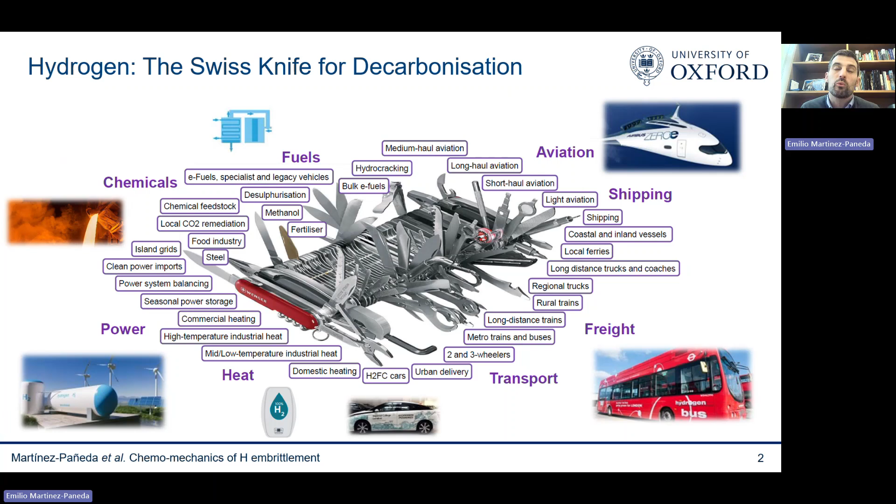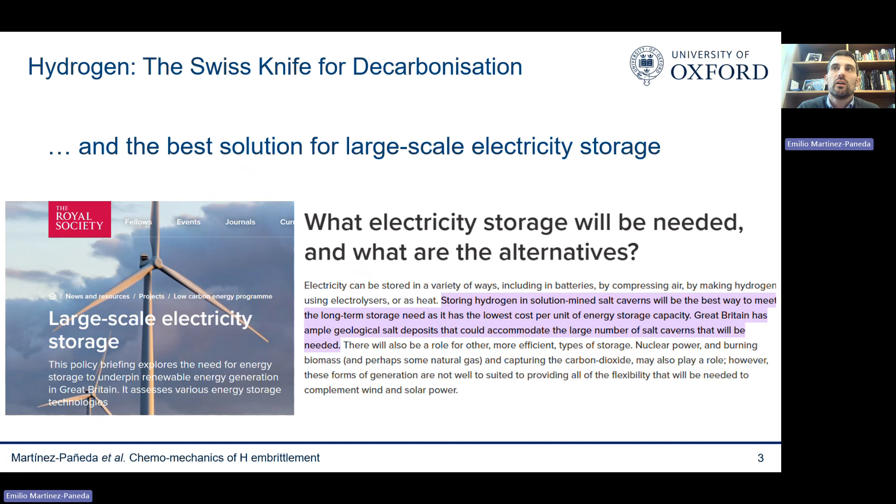As you can see here in this Royal Society report, hydrogen is also deemed to be the best solution for large-scale electricity storage. Large-scale electricity storage is fundamental to a society based on high renewable energy. So yes, hydrogen is going to be there, and governments around the world are investing significant amounts of money in establishing a hydrogen energy infrastructure that currently doesn't exist to store and transport this green hydrogen.

You see in the slide Europe's hydrogen backbone, a framework of 40,000 kilometers of pipelines that includes some new pipes, but mostly, as you can see with the dark color, natural gas pipelines that are being retrofitted or repurposed to transport hydrogen gas.

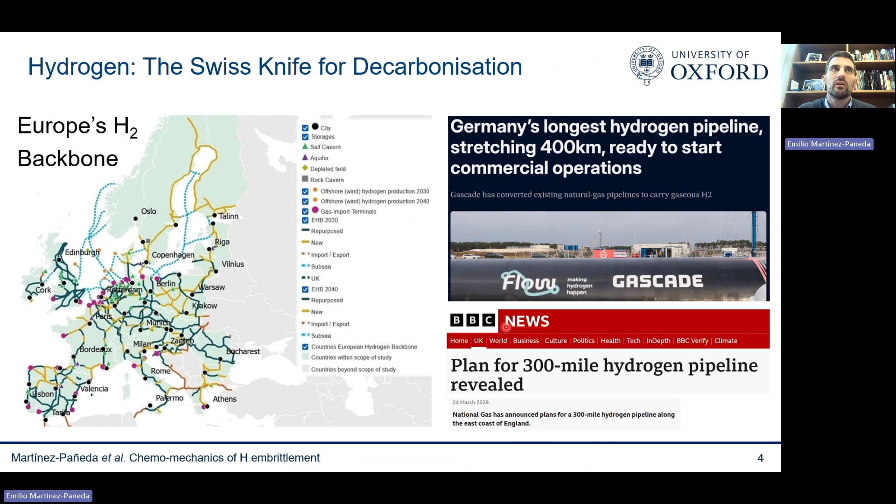As you can see from this newspaper article, some countries are already starting to do so. Germany already has hundreds of kilometers of hydrogen transport pipelines, and the UK is also planning to do so very soon. But the problem with hydrogen is that it has a dark side.

We have known for almost 150 years that hydrogen makes metals brittle. You can see this in this paper from Johnson in the Proceedings of the Royal Society, where he talks about some remarkable and extraordinary decrease in toughness and breaking strain in iron and steel in the presence of hydrogen. In those days, scientific writing used to be very objective, and you would rarely see words such as remarkable or extraordinary. But the way that hydrogen interacts with metals is indeed quite remarkable and extraordinary.

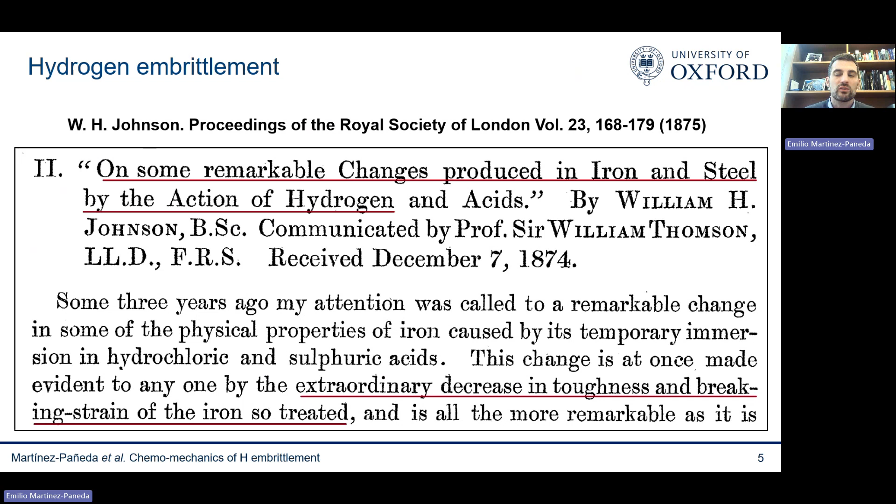You can see some examples here. On the left, I'm showing some uniaxial stress-strain curves. You see that if I introduce hydrogen into my samples, for example by exposing them to hydrogen gas, there's a very significant reduction in ductility, in failure strain. This is a pipeline steel, by the way.

In the middle, you see the impact on toughness. That is quite remarkable. This is for a pressure vessel steel: just 6 parts per million of hydrogen, a tiny amount, takes you all the way from a 220 megapascal square root meter fracture toughness to below 20 megapascal square root meter. So a tiny amount of hydrogen reduces the fracture resistance of my pressure vessel steel by an order of magnitude, going from something very ductile to something that is as brittle as an engineering ceramic.

And the effect is also quite significant on fatigue crack growth. You see this here for pipeline steels exposed to hydrogen gas, in a log-log plot. This is the response in air, and this is, over the Paris law regime, the response in hydrogen. You can see that there's at least one order of magnitude elevation in fatigue crack growth rates.

So we may wonder how we're going to be able to deploy this hydrogen storage and transport infrastructure, given that the materials we use for storage and transport become so susceptible to this hydrogen embrittlement phenomenon.

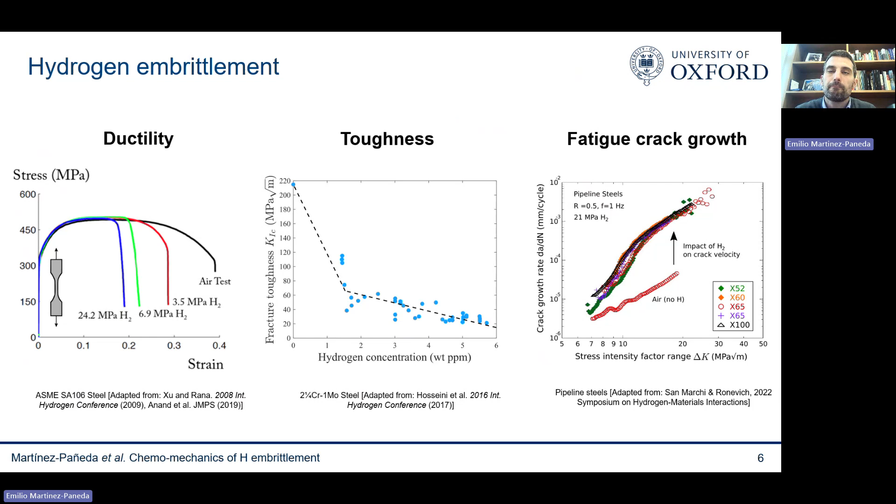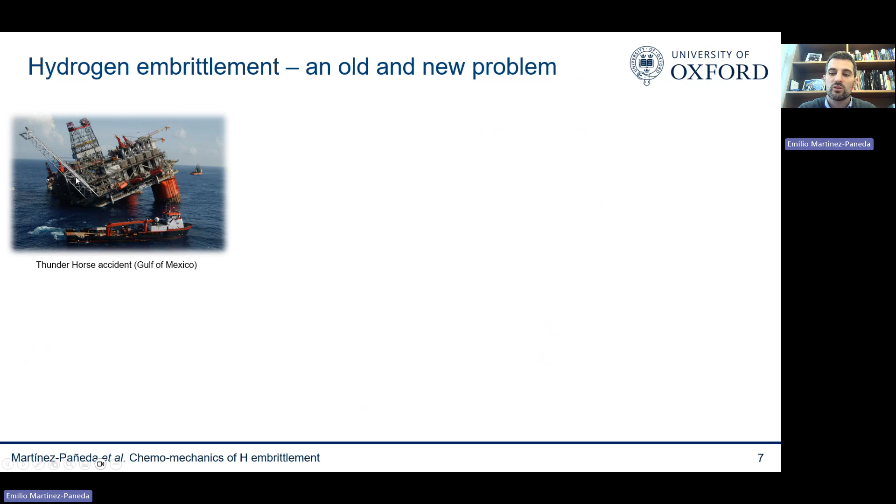But not only in this environment - with the use of modern high-strength steels, which are more susceptible to hydrogen, we are seeing hydrogen-assisted failures in many applications and sectors, just because of the hydrogen coming from humidity or from manufacturing processes. You see here a couple of famous examples: the San Francisco Bay Bridge bolt failure, but also the Cheese Grater, or Leadenhall Tower, in London, one of the most famous skyscrapers in London from a few years ago.

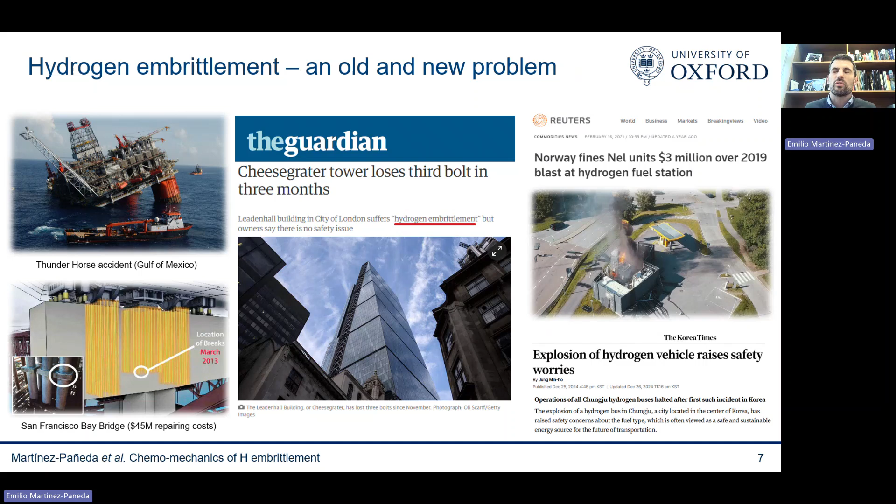This is going to be an even bigger problem when it comes to the energy transition, where we want to store and transport hydrogen gas at large scale. Even though the technology isn't there yet, very few countries have already started to deploy this infrastructure, and those countries are already seeing accidents as a result of hydrogen-assisted fractures.

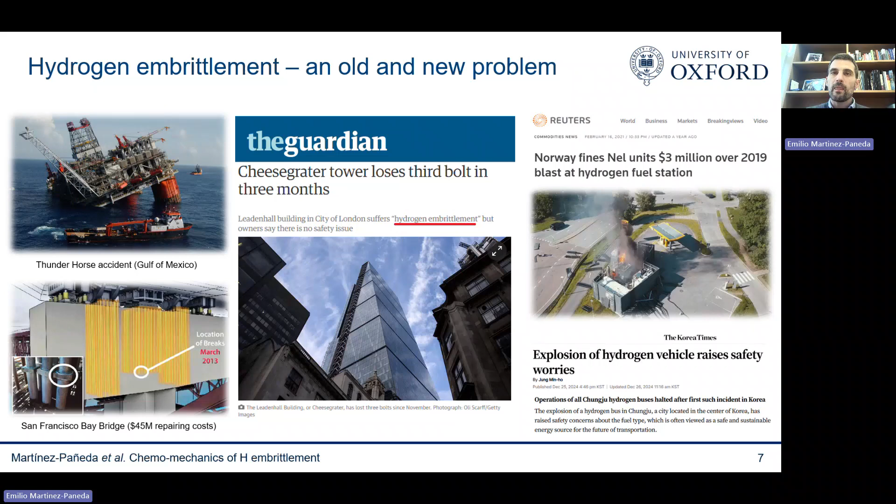So what we need is some sort of mechanistic tool and framework that allows us to predict when these failures will happen and prevent them, but also to map safe regimes of operation so we can accelerate this energy transition and deploy hydrogen energy infrastructure faster and more safely. This is what we've been working on in my group for the past few years: developing a mechanistic computational model capable of predicting when hydrogen-assisted failures will happen.

My philosophy has always been to maximize the physics and minimize assumptions and parameters. Ideally, I would like a model that does not rely on any magic fitting parameters, alpha, beta, that have no physical meaning. I want a model that relies purely on well-identified physical properties I can independently measure in my lab—yield stress, diffusivity—things with clear physical meaning.

The only way to do that is to resolve the physics of your problem explicitly, directly. So I'll explain how our modeling framework encompasses the three main stages of hydrogen embrittlement: the hydrogen ingress part, the uptake of hydrogen into the metal; the transport of hydrogen within the component; and finally the embrittlement process itself, how hydrogen assists in nucleating and growing cracks. Let me go one by one.

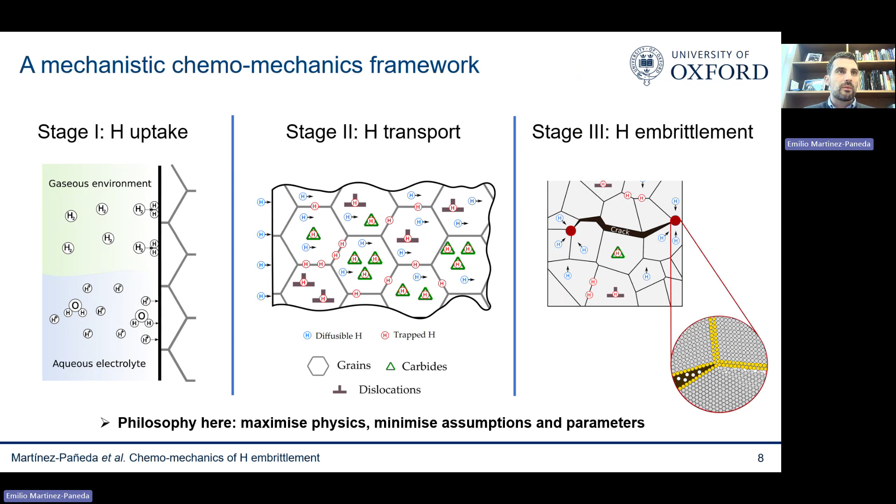We start with the uptake stage. Here the goal is, for a given environment, to predict the hydrogen concentration at the surface of my metal. Hydrogen can come from many places—gaseous hydrogen, any environment containing hydrogen molecules, aqueous electrolytes, manufacturing processes, welding, or soil.

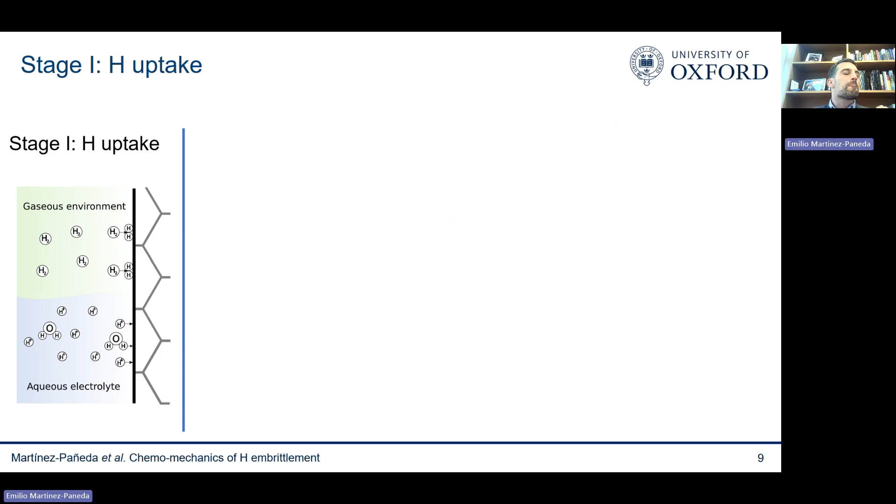But the two main environments I'll focus on today are gaseous environments, which are relevant to the energy transition since we store and transport hydrogen in gaseous form typically, and also aqueous electrolytes, relevant for example to that oil and gas failure I showed you before.

The good news is that for a gaseous environment, under steady state conditions, we do have a closed form solution—what we call Sieverts' law. It relates the quantity I'm interested in, the hydrogen concentration at the surface, with the quantity described in the environment, the hydrogen pressure, which I know or define as an engineer. The only thing connecting them is the material solubility, which I can identify easily with a permeation test.

One thing to be careful about is that this material solubility depends on the hydrostatic stress. You can show this easily—this blue term has an exponential with hydrostatic stress inside it. So the coupling with mechanics is very strong, and normally we measure the stress-free solubility in a permeation test. One has to be aware that this stress-free solubility needs to be enhanced with mechanics if you want to accurately predict the concentration of hydrogen ahead of stress concentrators such as cracks.

But again, this is good news because I can measure the stress-free solubility. This term comes from a finite element analysis for whatever defect I have, and this comes from the environment, so I can predict my hydrogen concentration.

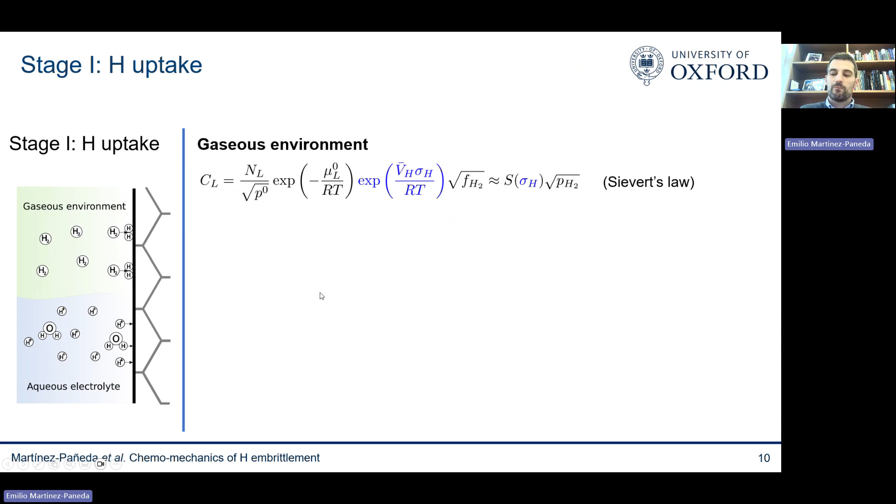In the case of an aqueous electrolyte, problems are much more complicated. You not only need to resolve the surface reactions happening at the interface between the metal and the electrolyte, but also the electrochemistry of the electrolyte, which can be very different inside cracks and occluded environments compared to the bulk, where you can do your engineering measurements.

The good news is we know the differential equations describing each of these phenomena. At the surface, we have the Volmer, Heyrovsky, Tafel, and absorption reactions, so you need to resolve those hydrogen evolution and absorption reactions—again, we know the math for that. And in the electrolyte, you solve for the electrochemistry, the Nernst-Planck equation and the electroneutrality condition, which are relatively well established—the type of models and equations that we like.

Because how those ionic concentrations change depends on diffusivity, Faraday's constant, temperature, gas constant—things that have a clear physical meaning that we can independently measure. And when you do that, you solve these equations in your favorite finite element framework.

This is the type of boundary value problem you solve, where you have an electrolyte with many ionic species, and then a metal that is deforming and has hydrogen being ingressed into it. Every one of these variables is a nodal degree of freedom. So as you can see, the models can get a bit heavy, but computers are big enough these days that we can tackle those problems.

The representative result you get will be something like this, where I'm plotting on the electrolyte any relevant quantity, in this case the pH. You can see how it varies quite dramatically inside of the crack, to the place where we do our measurements—hence why we need these modeling tools.

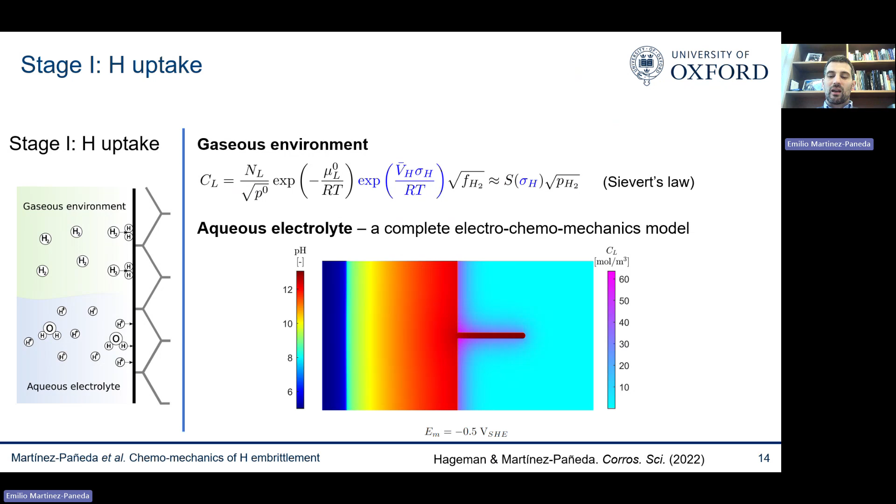We published this a few years ago for three main reasons. One is that it allows us to predict hydrogen embrittlement in aqueous electrolyte environments. For example, relevant to that oil and gas failure that I showed you before, for a given environment I can predict what is the uptake of hydrogen, and then I can predict how much hydrogen changes our mechanical and fracture properties. The other reason why they have become quite popular is that they've become very useful for the electrocatalysis community.

Apparently they didn't have a good model, but they're very interested in optimizing the hydrogen evolution reactions and developing electrolyzers that optimize that behavior. So this model has proven to be quite useful for them.

Finally, last but certainly not least, you can use these models to establish a correlation between aqueous electrolytes and gaseous environments. This is important because gaseous environments are what matters when it comes to the energy transition. However, doing experiments in gaseous environments is not only expensive, but also difficult and challenging from a health and safety point of view.

So we can introduce hydrogen to our samples using an aqueous electrolyte, which is much cheaper and easier. Then we can quantify, for that aqueous electrolyte, what is the equivalent hydrogen concentration. So if I go to my crack tip, I can input this here and then understand what is the equivalent hydrogen pressure. We can establish a correlation between electrochemical and gaseous environments.

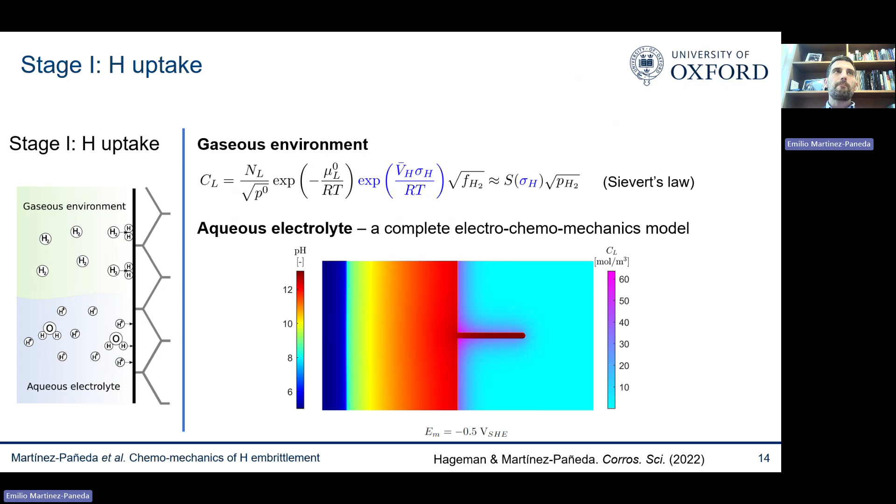Once you know how much hydrogen you have on the surface of your metal, you want to figure out how that hydrogen is distributed within your material, your microstructure, or your component. This is also relatively well understood.

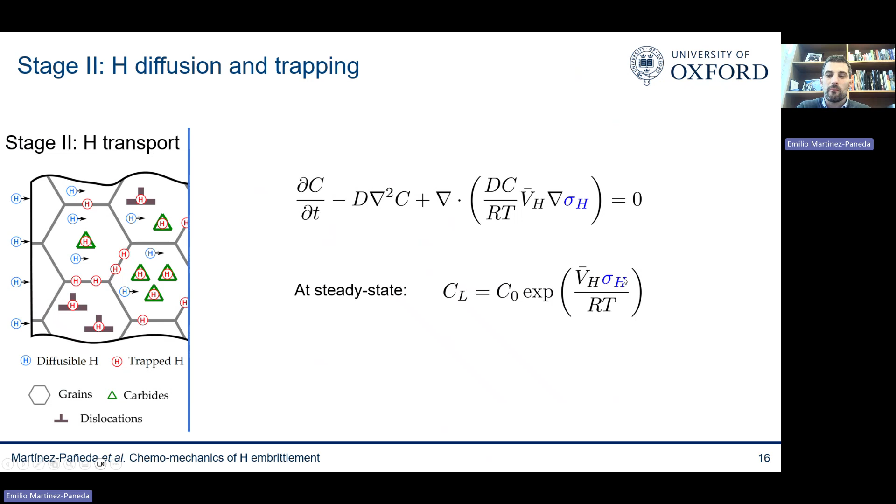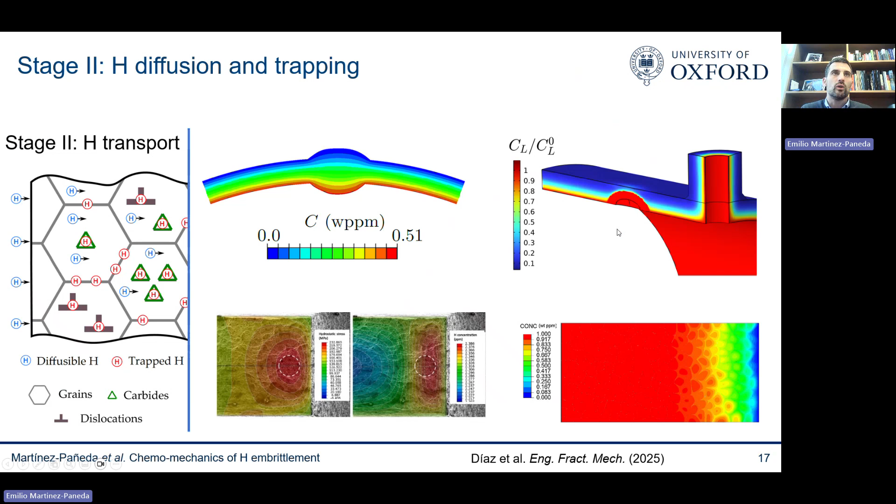Hydrogen not only travels freely through the crystal lattice, it's also sequestered at what we call hydrogen traps—microstructural defects, grain boundaries, carbides, dislocations. We can easily extend the model that I showed you before. You can see here, this is very similar to what we had before.

The only difference is that now we have an effective diffusivity that basically characterizes the fact that as the hydrogen encounters those traps, it slows down its lattice diffusivity. So basically the model relies on two parameters: you now have a lattice hydrogen concentration and a trap hydrogen concentration.

Predictions rely on two extra variables or physical properties. The trap density—how many traps you have. This is relatively easy; you figure out how many grains you have for a given volume. And the trap binding energy—this tells you how energetically favorable it is for a hydrogen atom to go to a grain boundary, dislocation, or carbide. This is something we can measure using TDS, thermal desorption spectroscopy.

And we have developed something that we have in our lab.

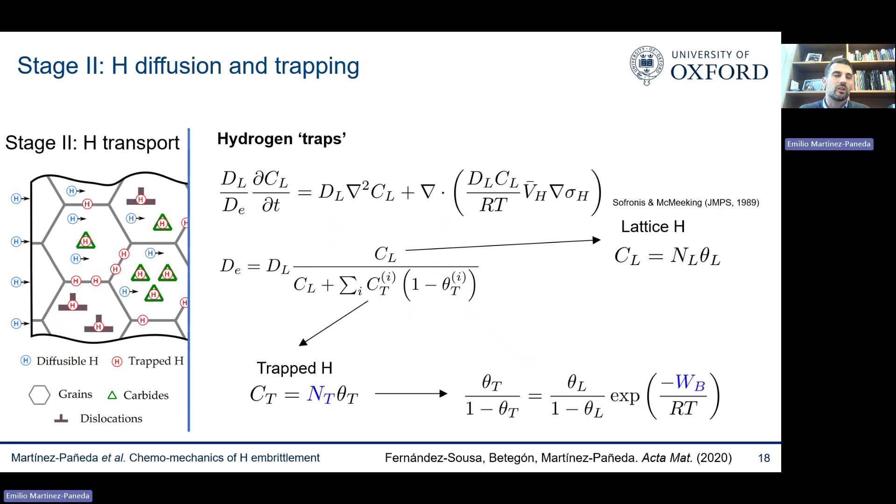And we also develop something called the TDS simulator, which is a Python and MATLAB app that allows you to easily identify these binding energies and trap densities from these TDS measurements.

One thing I will say about these traps is that there's a coupling with mechanics, because in general the trap density doesn't really change. The number of grain boundaries you have doesn't change with mechanical straining typically. However, dislocation traps will change. The number of dislocations you have is related to dislocation density, which is related itself to plastic strains, but also to plastic strain gradients.

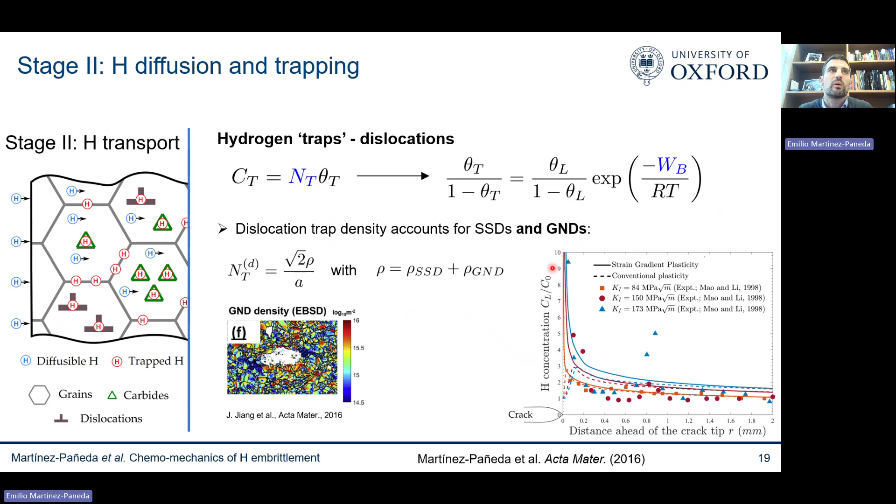And this is an important bit. GNDs dominate behavior near inclusions, cracks, and other stress concentrators. GNDs are also obstacles to other dislocations, so they bring local hardening, as you can capture through strain gradient plasticity theories. And when you do that, it's the only way you can actually show that you're able to capture the very high hydrogen concentrations you see ahead of cracks and other stress concentrators, like you see here in the experiments. So GNDs and strain gradients are important.

Then once you know how much hydrogen you have, where and when, you need to predict the fracture. How does hydrogen interact with cracks? And here there are two challenges: one physical, how does hydrogen actually embrittle metals, and the other one is computational.

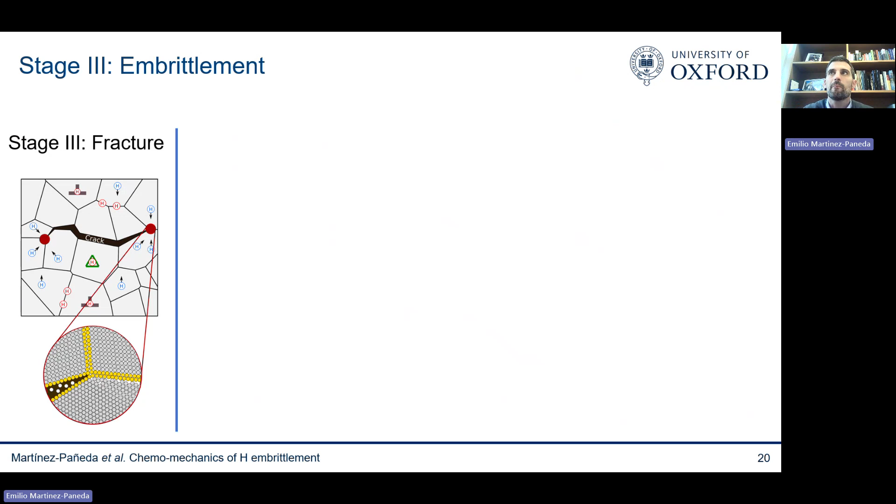You need a tool that allows you to simulate how cracks evolve. Cracks are discontinuities, interfaces. We don't like discontinuities, we like things to be smooth. And we need to capture how this discontinuity evolves, combined with all the chemomechanics or electrochemomechanics I showed you before, like moving boundary conditions and so on. So that's a challenge, and what has worked very well for us there is phase field models.

Phase field models have been a revolution in many areas of science and engineering. The idea is that you replace a discontinuous sharp interface by an implicit domain, an implicit interface. You use an auxiliary variable to smear that interface over a finite domain, and then you solve implicitly for the evolution of this phase field variable. This phase field variable tells you basically whether you are inside of the crack or outside of the crack.

This has been going on for quite a while. It was first proposed in the context of microstructural evolution, solidification, what is now by far the most dominant technique. It also very quickly has become the most powerful or popular technique to simulate cracking and fracture mechanics problems. You can see here why.

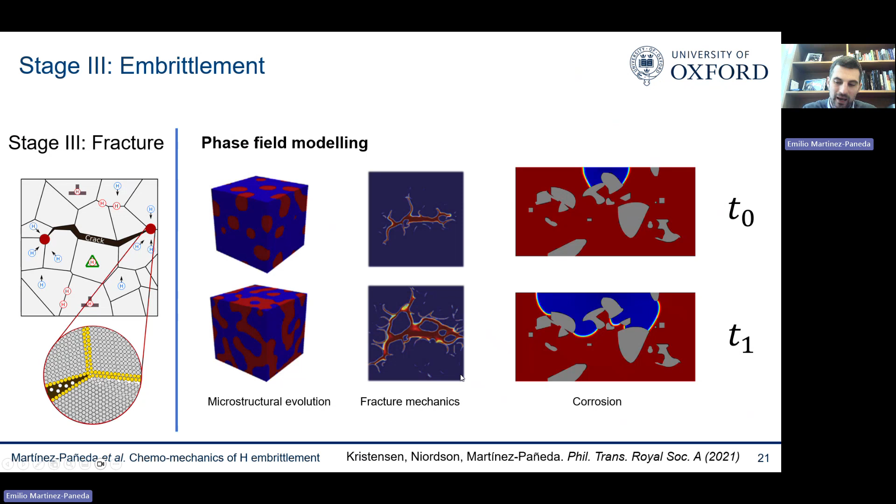But today I'm going to focus all about fracture. I want to predict the evolution of cracks together with all my hydrogen environment. And the good thing is that phase field not only is a powerful computational technique in the sense that it allows you to simulate very complicated cracking patterns without convergence issues and independent of an element mesh, but it's also physically sound, because it's based basically on Griffith's energy balance, on the thermodynamics of fracture.

So it's effectively a competition between the strain energy density, the energy that you store in your material, and the fracture toughness, a material property that I can easily measure. This is the phase field evolution equation that dictates the value of this phase field, kind of like a damage variable. You see it goes from 0 in intact material points to red 1 inside of cracks. This is, by the way, crack branching due to the application of a dynamic load as predicted by phase field. And then, like a damage variable, it basically degrades your load carrying capacity.

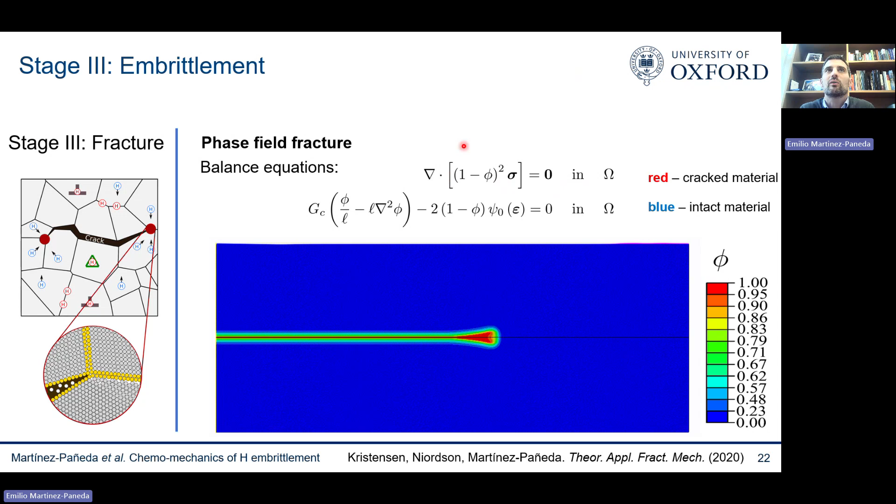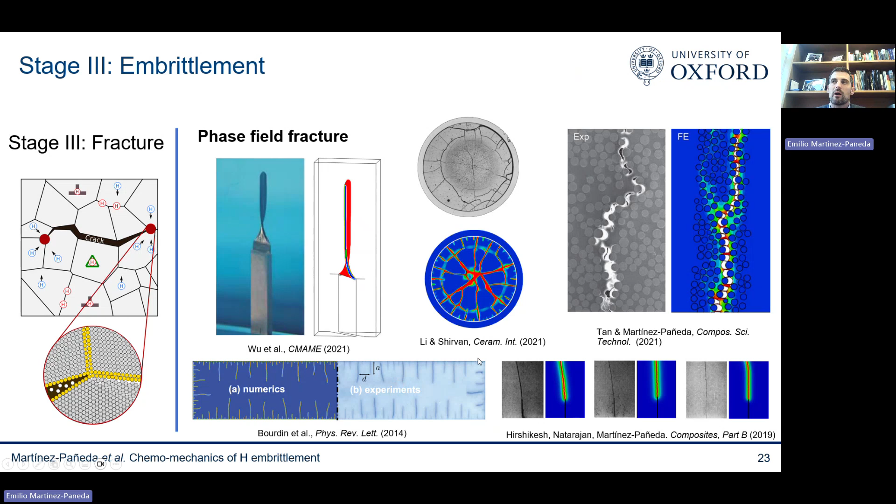But nothing had been done on hydrogen, so we proposed the first phase field model for hydrogen embrittlement. We proposed a series of models, but the simplest one you can think of is one where you solve for the deformation, diffusion, and damage process. I'm highlighting here some of the couplings, but of course the key coupling is this one: how does hydrogen reduce your fracture energy, your fracture toughness?

We know qualitatively what happens: the more hydrogen you have, the less fracture resistance. But the key question is how you do that quantitatively. And we've done it in two ways.

One is what I call the mechanistic approach, where we basically try to understand how this happens. So we look at the atomistics, we look at the DFT, and we are able to predict, as a function of hydrogen occupancy on a relevant interface like a grain boundary, atomistically, from first principles, what is the degradation in fracture energy.

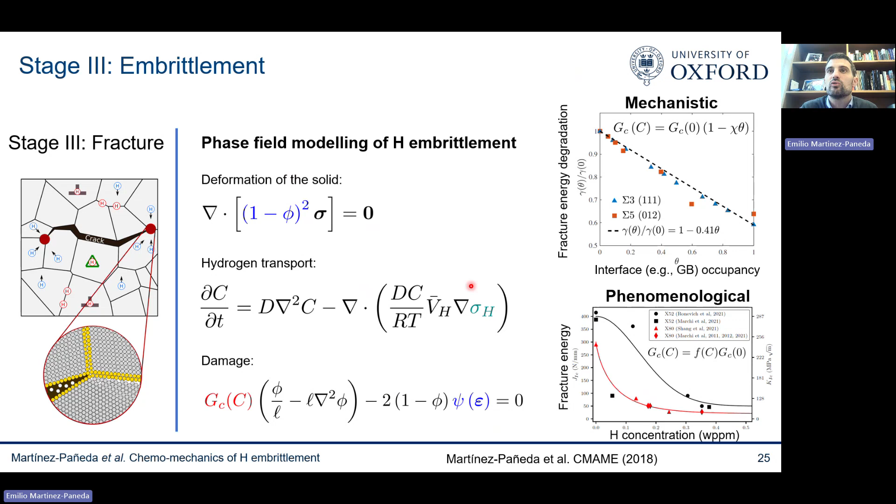Based on this DFT calculation that we do once in our lifetime offline, we can directly input that into our model. But working with industry, a lot of industry partners tell us they don't really trust atomistics that much, and in any case we have a lot of data of fracture energy versus hydrogen concentration. So why don't we just feed that data and incorporate it into our model? This is something you can do, of course.

We've been using these models for quite some time now, and we've been able to show that they are able to capture very well experiments. You see an example here—symbols are experimental data points. You see examples here with high-strength steels, duplex stainless steels, pipeline materials.

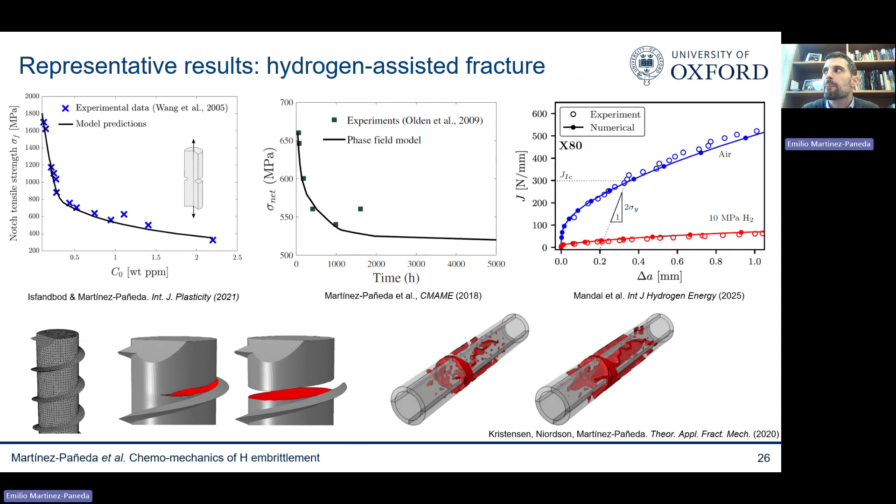So let me just finish over the last 5 to 7 minutes by providing 2 case studies that I hope highlight the potential of these methods. The first one is related to predicting hydrogen-assisted fatigue.

Of course, as you can imagine, most of the components in the hydrogen energy sector are going to be exposed not only to hydrogen, but also to cyclic loading. So we need to be able to predict what is the effect of hydrogen on fatigue.

Some data is out there. This is, for example, data from Sandia National Labs, where you see fatigue crack growth rate for different hydrogen pressures, up to 100 megapascals, different load ratios, and different frequencies. This data is very, very useful, but it has some limitations.

As you might imagine, very few labs in the world are able to obtain this data. 100 megapascal hydrogen pressure is very difficult to deal with—I would say a handful of labs in the world can capture this type of data. So the data is scarce and very useful, but it has some limitations.

One limitation is that practical applications involve low loading frequencies, and there's a frequency effect here. When you load very slowly, there's more time for the hydrogen to accumulate, so when we do fast experiments, we're being non-conservative. Ideally, we'd like to do experiments very slowly, but we can't, so there's a problem here.

The data is non-conservative, and it's also tied to the test conditions—each of these points is useful for one frequency, one load ratio, one material, one hydrogen pressure. But we want to be able to consider other conditions. Also, this is for a given load ratio, but realistic loading histories are much more complicated, and we cannot apply superposition since hydrogen brings a history dependency. We also want to predict the nucleation of cracks.

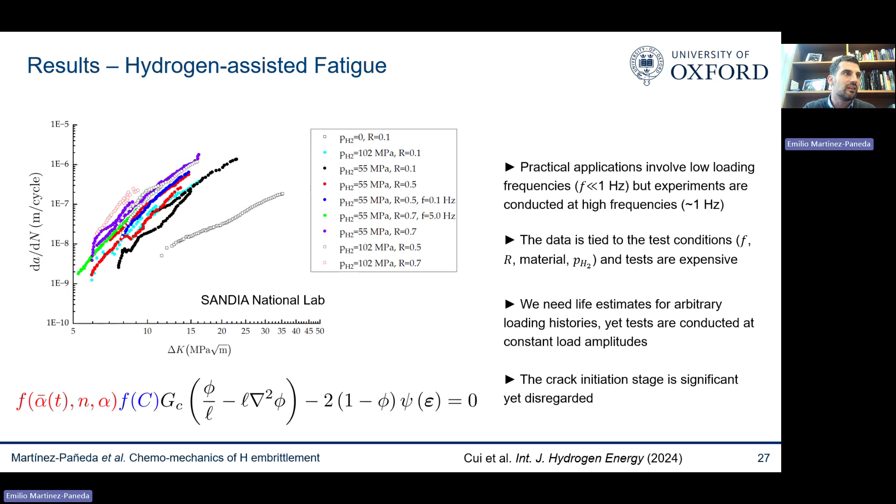Now the question is, can you blindly predict data? This is data they had at 55 megapascal hydrogen pressure. We're not allowed to touch anything in the model or change any parameters. We apply a boundary condition from Sieverts' law, we know for this pressure what the corresponding hydrogen concentration is, we put it into the model, and the line was the prediction of the model.

That was good. They also had data for a different pressure, 102 megapascals. Again, not touching anything in the model, all parameters remain the same, we just changed the amount of hydrogen. That came out of the model, so a very good agreement as well.

We were quite happy. They also have data for different load ratios. Again we don't touch anything in the model, the only thing we change is the way we load our sample. This is what came out of the model, and we were quite happy and impressed.

They also have data for different load ratios with different pressures. Again not touching anything, just changing the way we load our sample. A very good agreement all over the board.

They have data for different loading frequencies, loading slower or faster, and that's what came out of the model, for a given load ratio. They also have data for a different frequency with a different load ratio, and again a decent agreement, I would argue.

So all the data that we threw at the model was able to be blindly predicted without any recalibration whatsoever. I think that's quite powerful.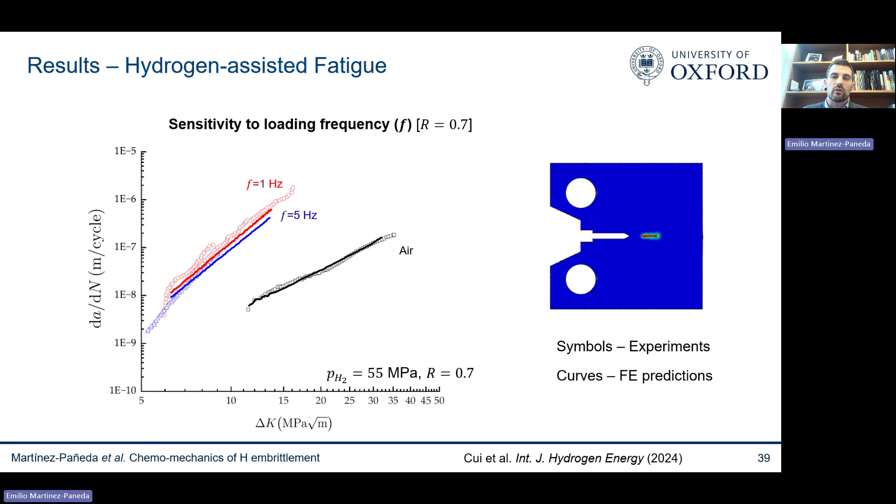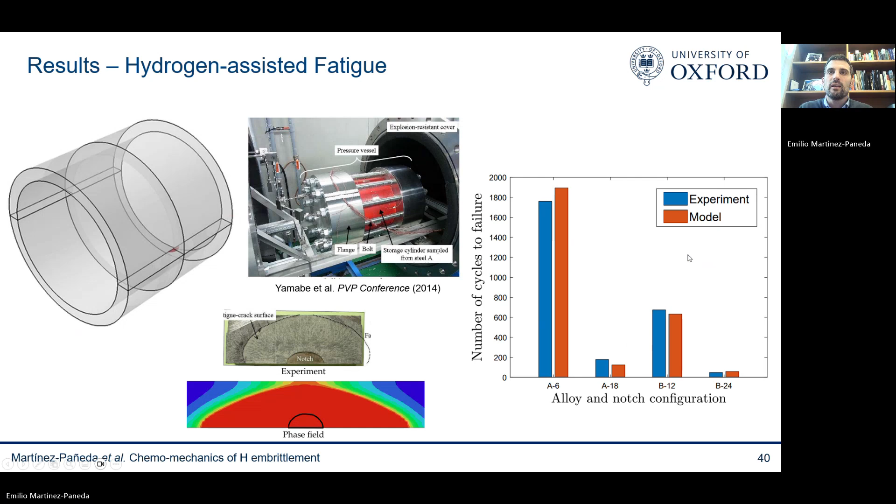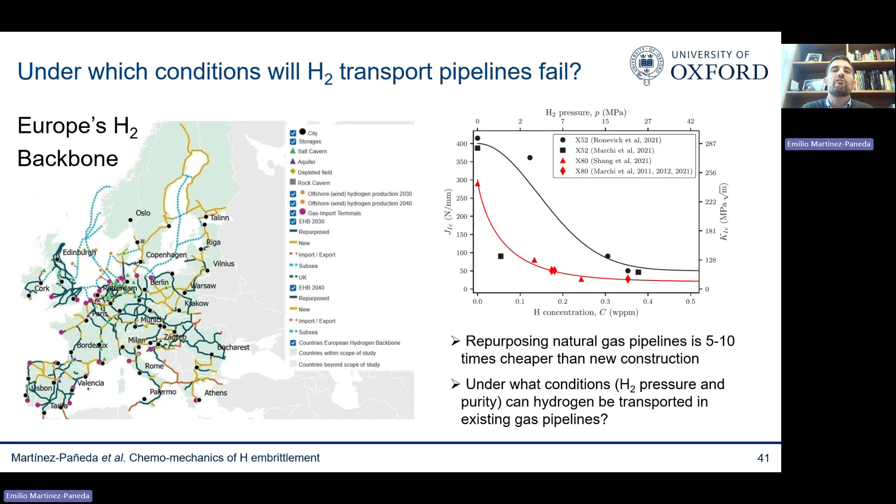The last case study is related to hydrogen transport pipelines. I said before, we want to deploy 40,000 kilometers of hydrogen pipelines over the next 4 years. The Germans already have a few hundred. But this is a problem because, as you can see, the toughness of pipeline steels reduces quite significantly with hydrogen, and these natural gas pipelines have been there for a long time.

So we need to understand under what conditions hydrogen can be safely transported in existing natural gas pipelines. This is a very difficult question to answer with experiments for a number of reasons. One is that we have a quasi-infinite combination of pipe and weld materials. We've been developing and deploying these natural gas pipelines for 5-6 decades, so we have different modern and vintage materials, welding done under different conditions, and a wide range of pre-existing defects. Also, as an engineer you have a quasi-infinite combination of parameters to decide.

You can transport pure hydrogen, or blended 5% with natural gas. You can also transport hydrogen at 100 bar, at 10 bar, at 5 bars. It's completely up to you. So there are many, many combinations, too many to test experimentally.

The other problem is that what's going to fail first are the welds, they're the weakest link in the pipeline, mostly the heat-affected zone, the area where things become brittle and hard. But the heat-affected zone is very small, so we cannot really extract sufficiently large samples to do fracture experiments there. And even full-scale experiments are difficult, because you have a native oxide layer that might prevent hydrogen uptake over the duration of your experiment, but not over the decades we want to transport hydrogen through these pipes.

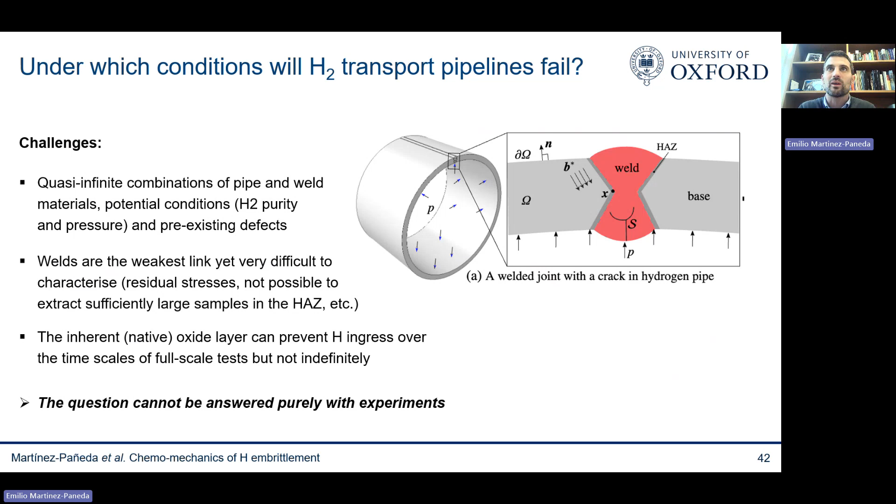So we need models. What we did was set up a new framework where we combine those deformation, diffusion, fracture, and phase field models that I showed you before with welding process modeling.

There's an entire community—I saw a few talks in this conference dedicated to either additive manufacturing or welding process modeling. We basically took off-the-shelf some of the models, but I was quite impressed by the quality. You run thermometallurgical simulations that tell you what is the residual stress, what is the state, what is the distribution of properties in the material.

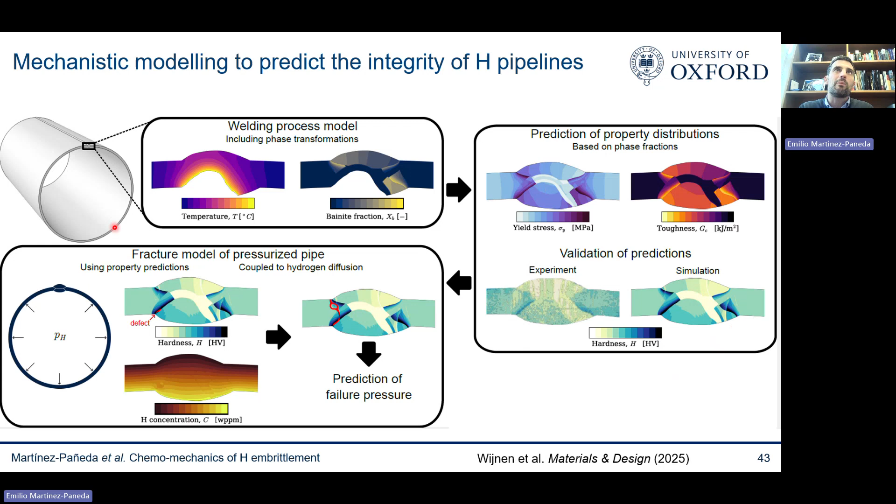That allows you to get hardness maps that you can compare to experiments, and then you run your coupled deformation diffusion model. Let me show you an example. This is a welding process.

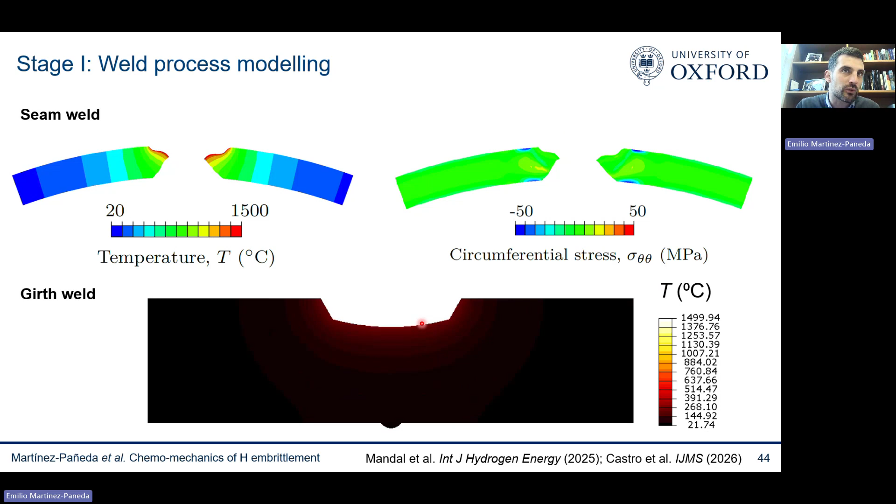On the top is a seam weld, on the bottom is a girth weld. You see how we simulate the different passes, and then you predict not only the temperature distribution and residual stresses, but also, depending on your cooling rates, what is your phase fraction—ferrite, pearlite, bainite, austenite—and how this changes.

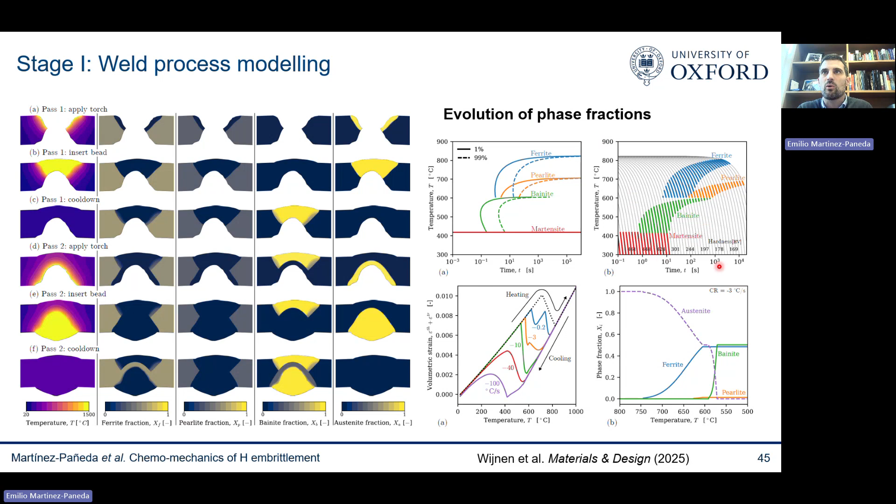These models are relatively empirical, but they're actually quite good—I was quite impressed by them. You can see that, depending on your phase fraction, what is the hardness of your material. So that allows you to validate.

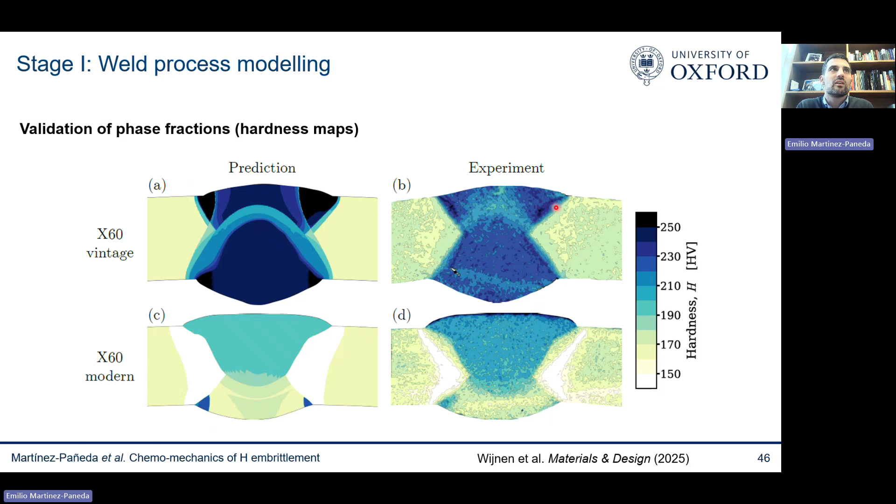You see here two types of welds. We apply the same welding protocol. And as you can see, we got actually quite a good agreement when it comes to the hardness maps, experiment versus the model. So I was quite impressed with these models.

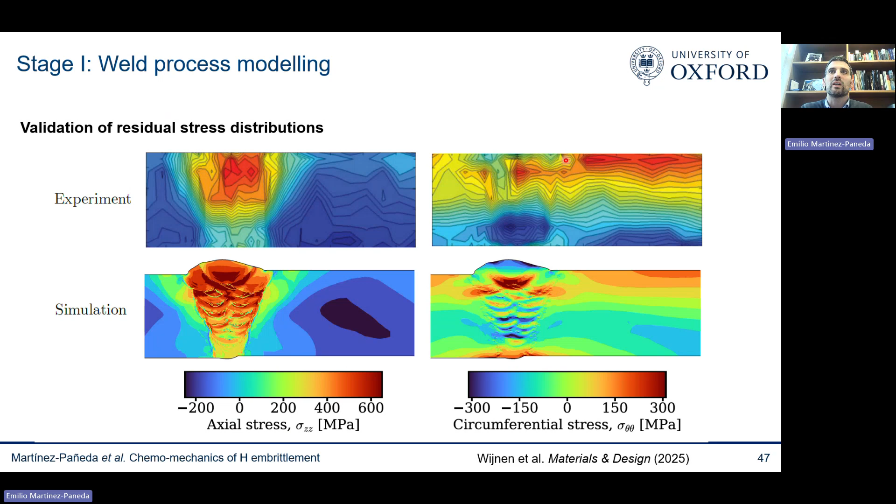Here you see a comparison with residual stresses. It's difficult to measure residual stresses in experiments—this is with X-ray diffraction. But again, using the same scale as in the hardness maps, we get what I would say is quite a decent agreement.

So then we use this, because now we know the distribution of properties and therefore the susceptibility to having—we naturally capture the fact that this heat-affected zone is going to be more susceptible. So we basically now ramp up the pressure.

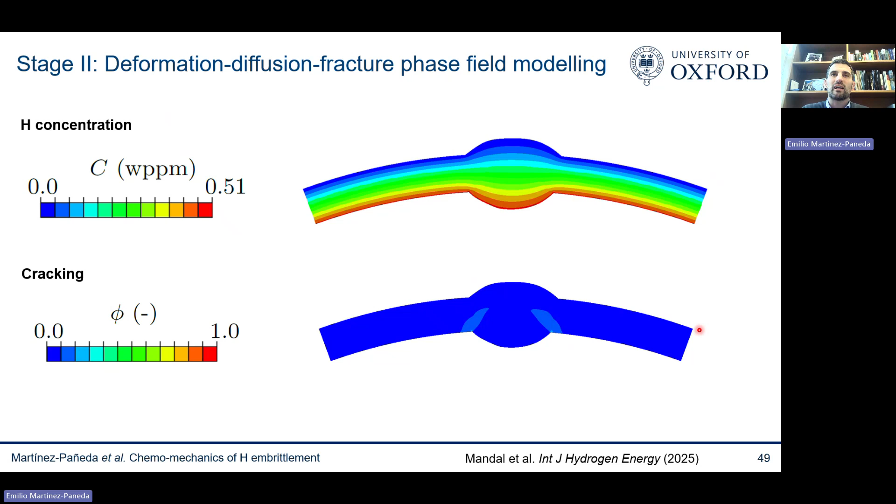You can see here we're ramping up the pressure. We see the hydrogen distributing. And at some point, you will see a crack forms. When we reach a critical pressure, the crack will grow and the entire thing will fail. So we did that, and we basically quantify at what pressures things will fail.

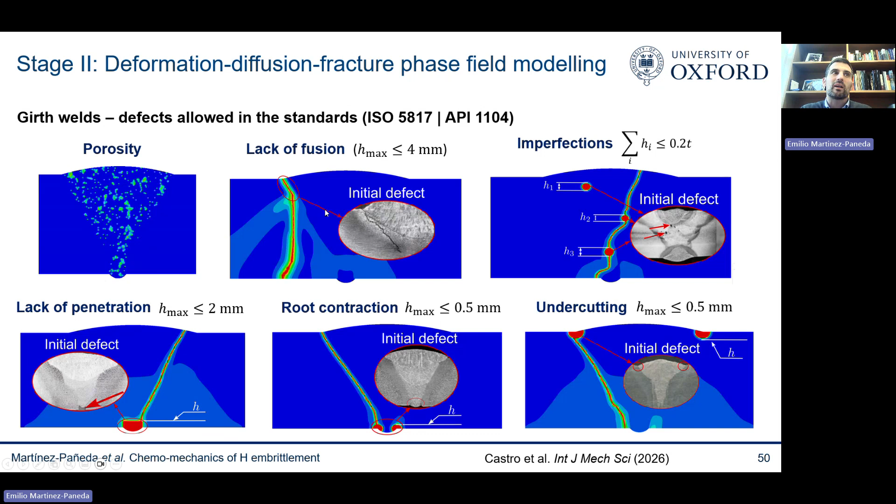We also try to learn things. We know that welding standards allow you to have certain types of defects due to lack of fusion, root contraction. So we incorporated those defects that are safe in natural gas, but as we realized, they're not always safe when it comes to hydrogen.

And then we learned a few things. Some of the things we learned were, of course, the defects play a big role. Microstructure also plays a big role, and residual stress is also important.

Just to finish, just on time, I would say that the combination of phase field and multiphysics, or chemomechanical, electrochemomechanical modeling, allows us to develop a mechanistic framework that lets us directly simulate the underlying physical processes in hydrogen uptake, diffusion, and embrittlement, and therefore eliminate those fitting coefficients and deliver predictions that are based purely on physical properties.

The framework is very general. These are, at the end, continuum finite element models. It's very easy to incorporate this into your model, and you can readily extend this to fatigue, welding, microstructure. You can combine this with crystal plasticity, whatever you want.

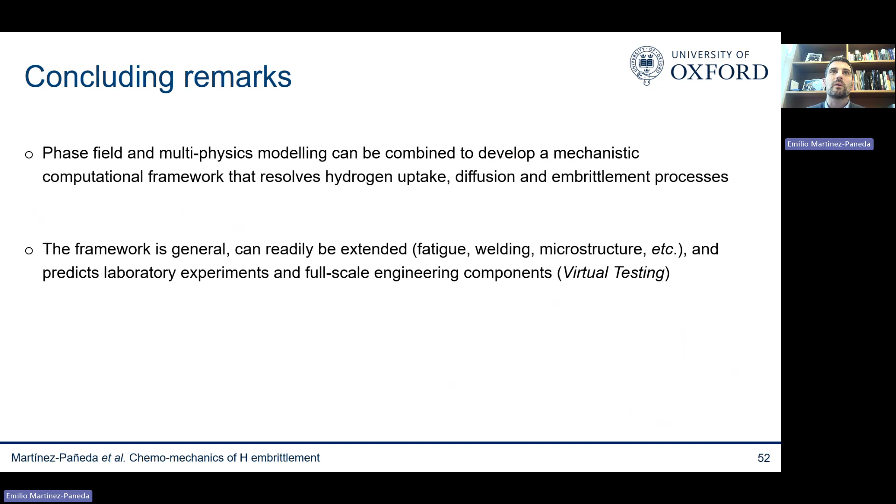I've shown you, hopefully convinced you, that we can predict not only laboratory experiments but also full-scale engineering components, so you can do this virtual testing. I particularly showed two case studies that I thought were quite relevant: the application of these models to predict fatigue crack growth, to conduct virtual fatigue crack growth experiments for any arbitrary condition, and also to determine the maximum admissible pressures that we can handle in hydrogen transport pipelines.